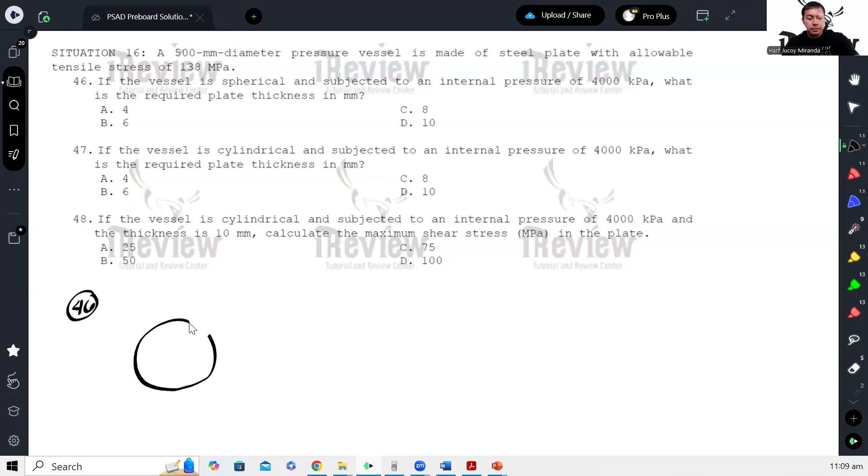So for number 46, given is that the shape is spherical. Hopefully we already have memorized the formula for the tensile stress due to internal pressure in thin-walled vessels. When the shape is spherical, actually wherever you cut, let's say you cut here.

Our formula for the allowable tensile stress is equal to PD over 4T, where P is the internal pressure. So if we cut it, this is what it would look like.

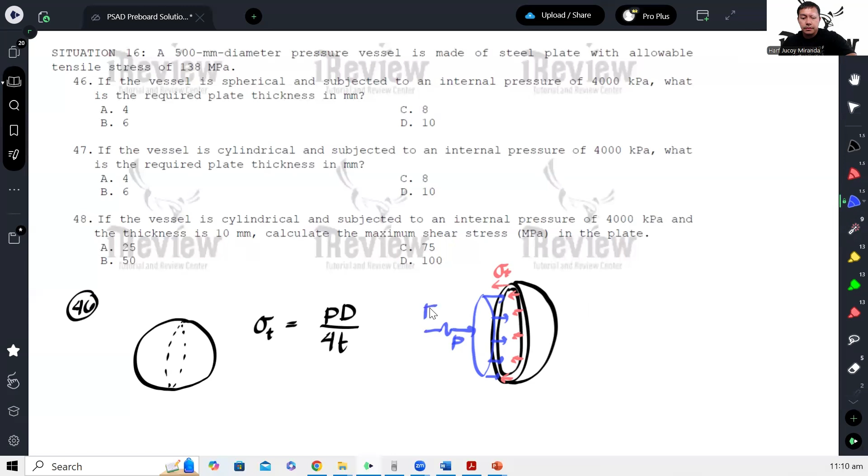This can be derived by getting the resultant force here, F. Then the resultant of those on the walls of the container, let's call it T. So summing forces, F is equal to T.

But what is F? It's P times the area of the circle. So P times area of the circle is pi over 4 times diameter squared.

This equals T, which is the tensile stress times the area of the wall. And that area is just circumference times thickness, so pi times D times the thickness. When simplified, the pi cancels, one t cancels.

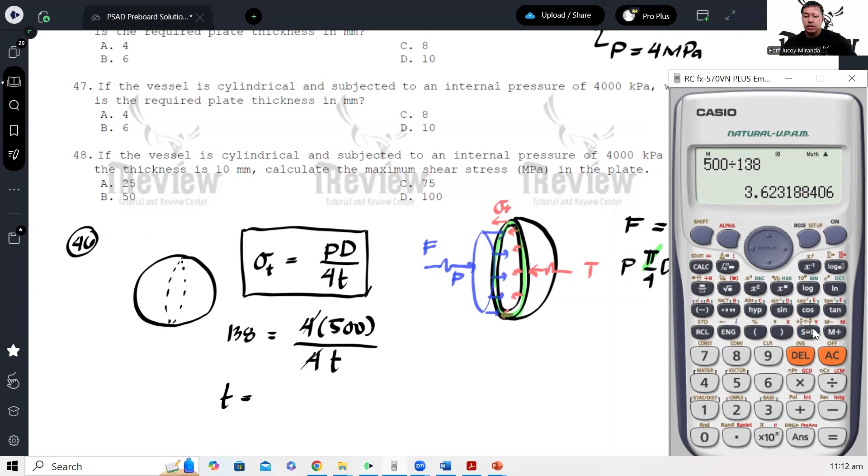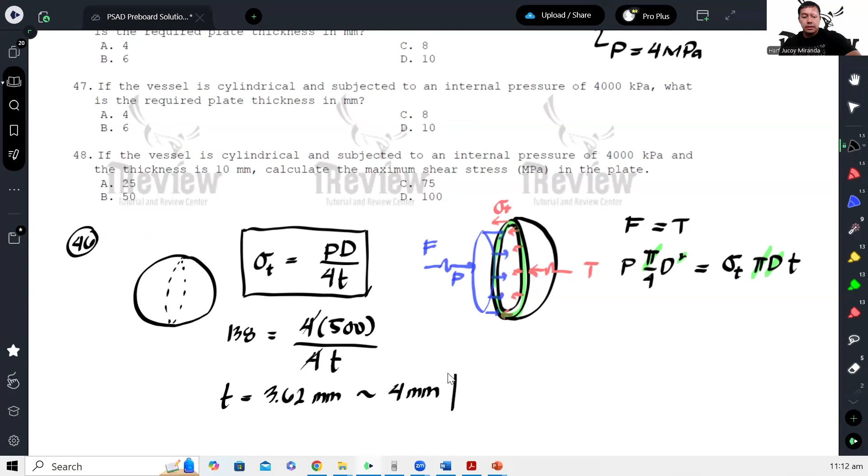From here you can solve for the thickness. So the thickness would be 500 over 138, around 3.62 millimeters. And in the choices it's a whole number, so we round up to 4 millimeters. The answer is letter A.

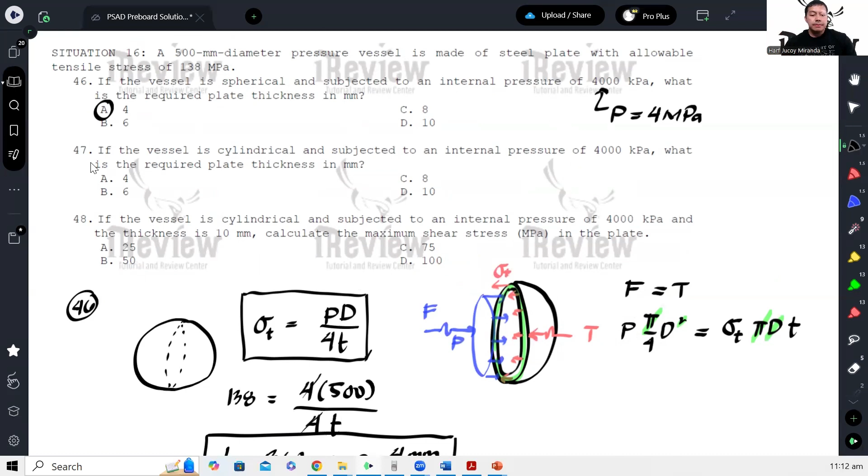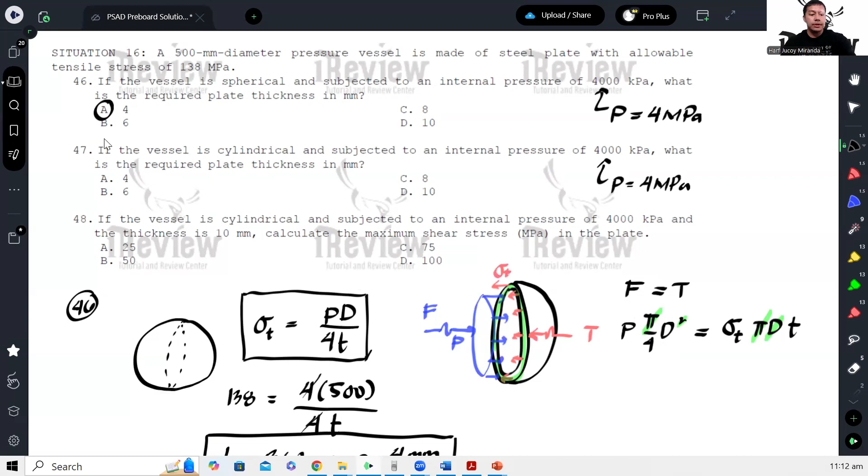For number 47, if the vessel is cylindrical and subjected to an internal pressure of 4 (same as before), what is the required thickness of the plate? Here, when cylindrical, there are two formulas: one is PD over 4T, the other is PD over 2T.

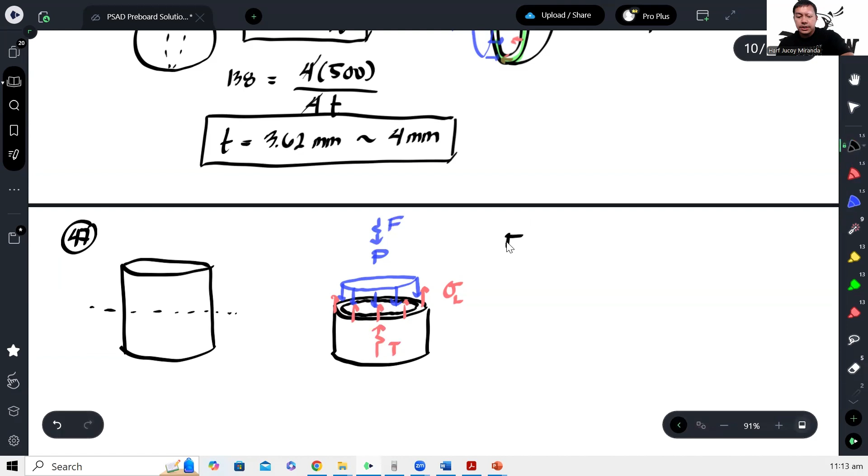Again this has a resultant, T. This one also has a resultant, let's call it F. So summing forces, our F is pressure times the area again, pi over 4 diameter squared, equals T, which is actually the stress sigma L times the area again of the wall, since that's where the stresses act.

That area would be pi times diameter times thickness. So again, what comes out is the longitudinal stress equals PD over 4T.

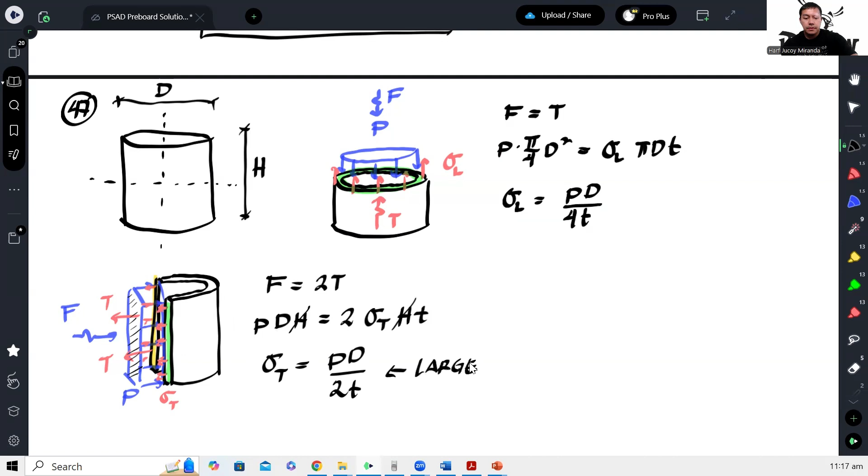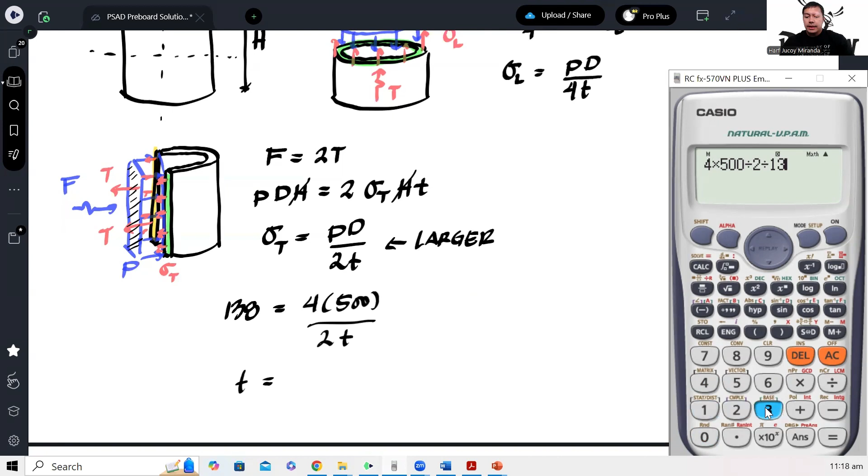Let's equate this to 138. So we have P, which is 4 megapascals, diameter is 500 over 2 times thickness. We can solve for the thickness required: 4 times 500 over 2, over 138. This is approximately 7.25 mm, so round it up to 8 millimeters.

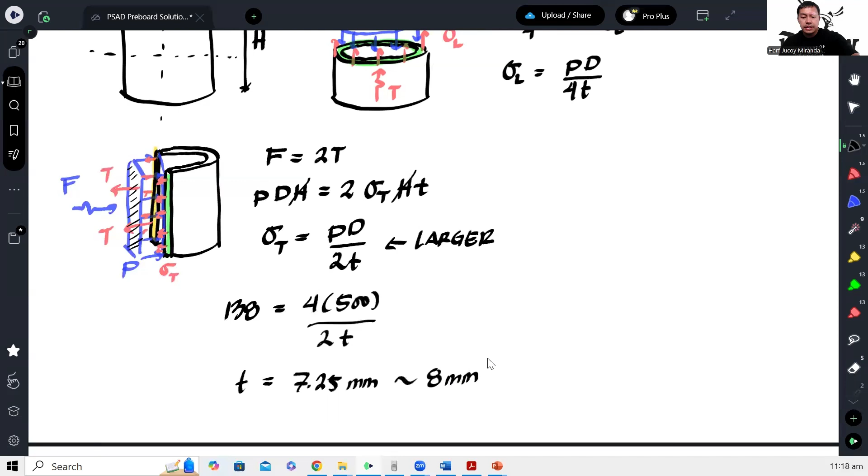For number 48: if the vessel is cylindrical and subjected to an internal pressure of 4000 kilopascal, and the thickness is 10, calculate the maximum shear stress.

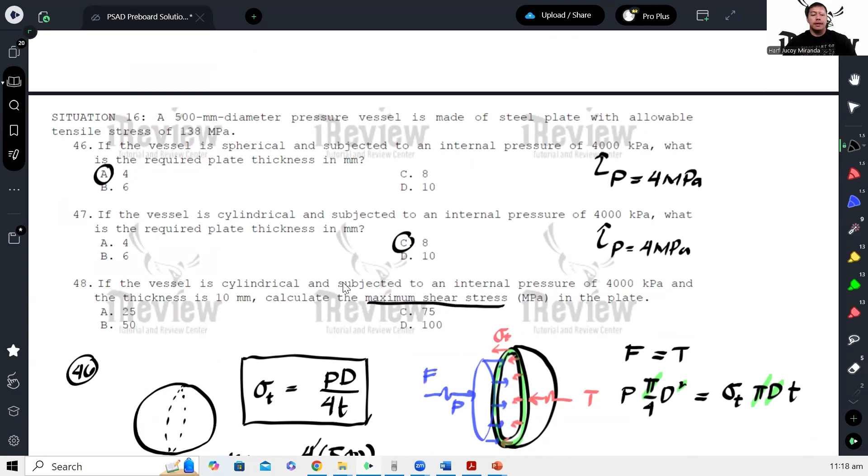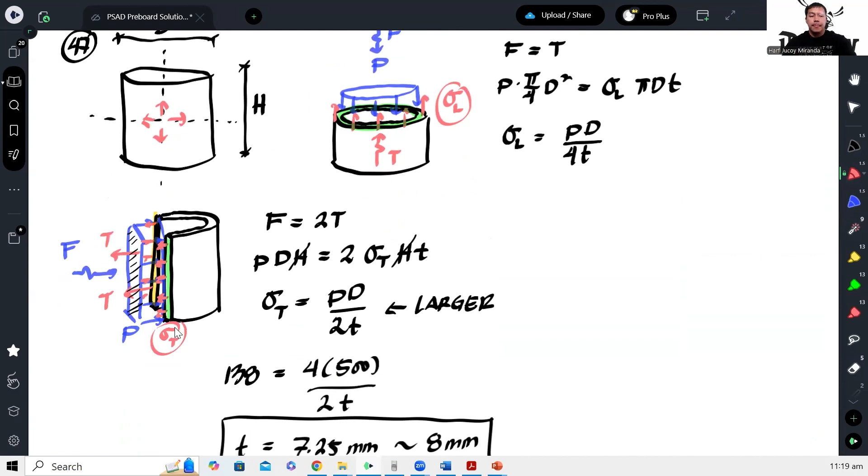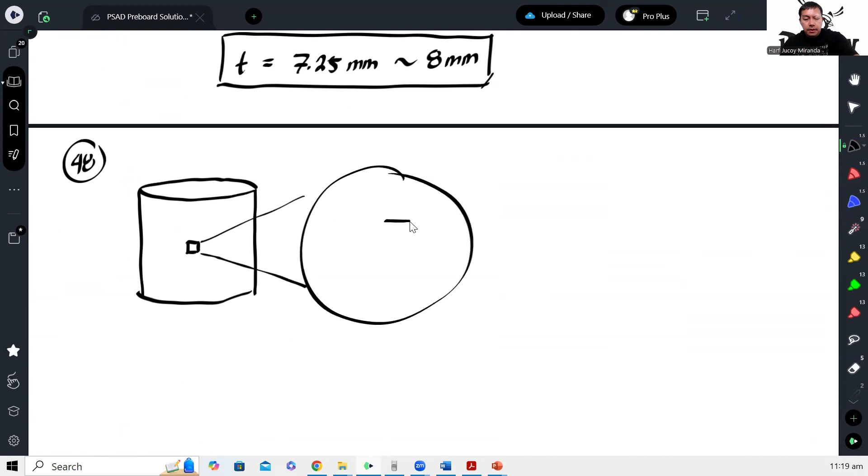Looking at this drawing, we have stress in this direction, and we also have stress in this other direction. So if we take an element, let's enlarge it. That element is subject to horizontal and vertical stresses.

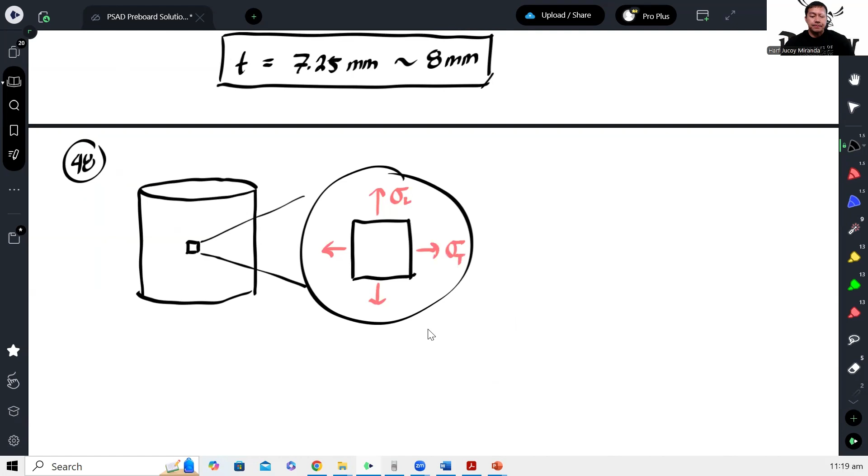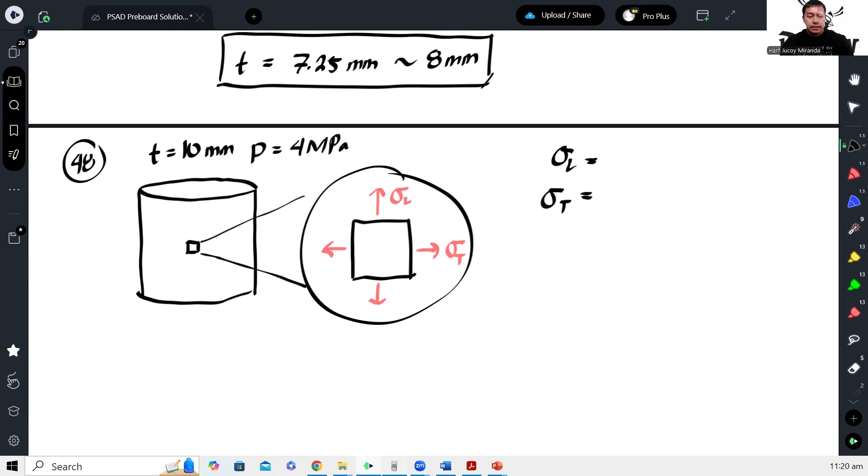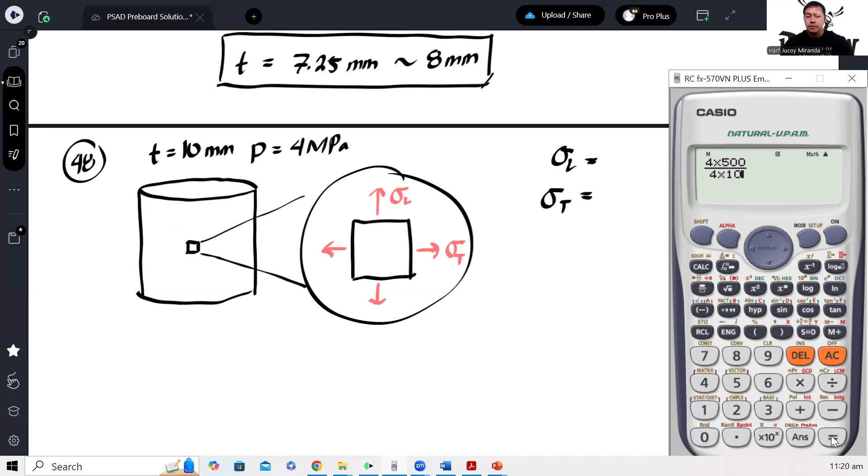The thickness given is 10 mm, and the internal pressure is 4 megapascals. Let's compute the longitudinal stress and the tangential stress. We have PD over 4T... PD over 40, so that's 50 MPa. Then this other one is 100 MPa.

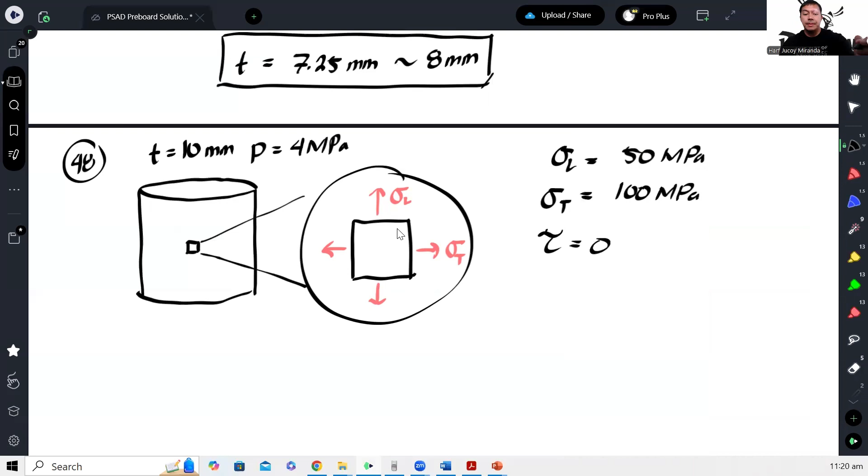The shear stress is 0 for this orientation. So if we draw this on a Mohr circle, for the 50 value the shear stress is 0, so it's here. Then for the other, 100, the shear stress is also 0, so let's say it's here. Then this is our Mohr circle.

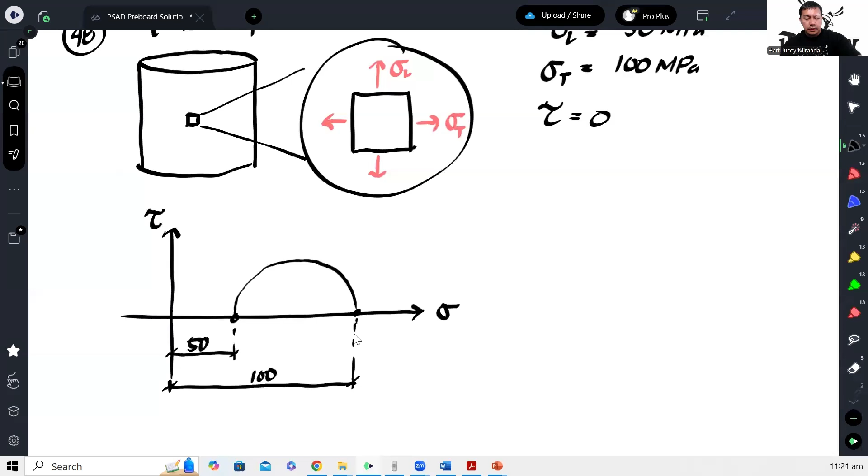The maximum shear stress will occur at the center of the circle, since that's the highest point of the circle along the shear stress y-axis. So this is the maximum shear stress, which is basically just the radius of the Mohr circle.

So what's the radius? Isn't it 100 minus 50? So 50 is the diameter, meaning the radius is 25. So therefore, the maximum shear stress would be equal to 25 megapascals.